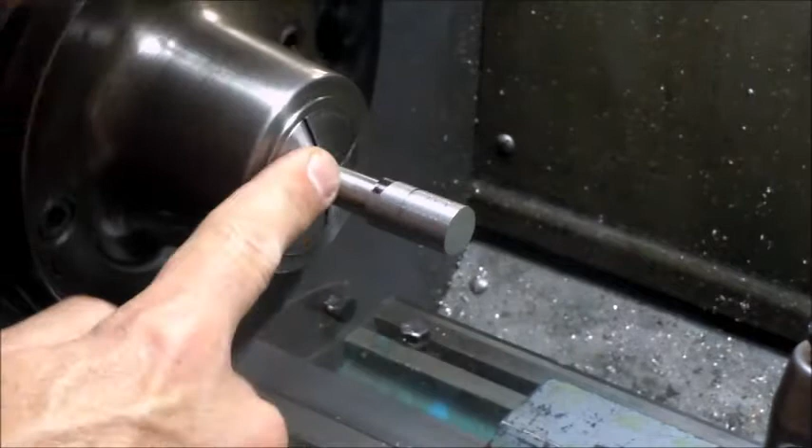So I've got the lead screw turned around in the collet chuck, and at this point I'm going to put a 1/4 inch shoulder here, or 1/4 inch wide by I think 625 shoulder there, and then I've got to turn 3/4 down to 0.53, and that gives us the material we need to put 375 square on there for the crank handle.

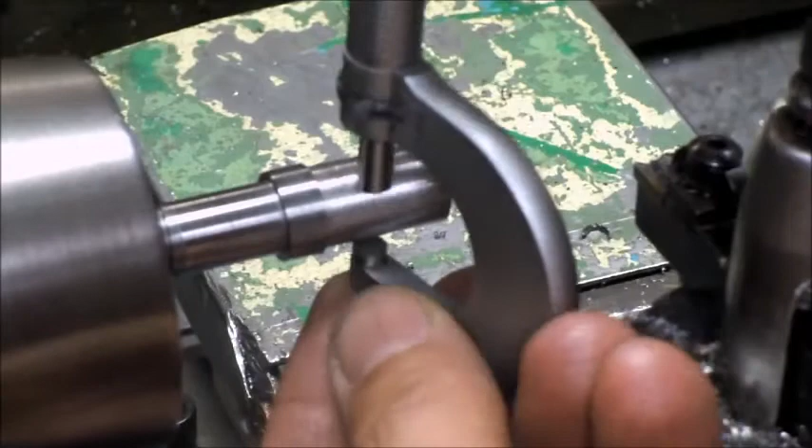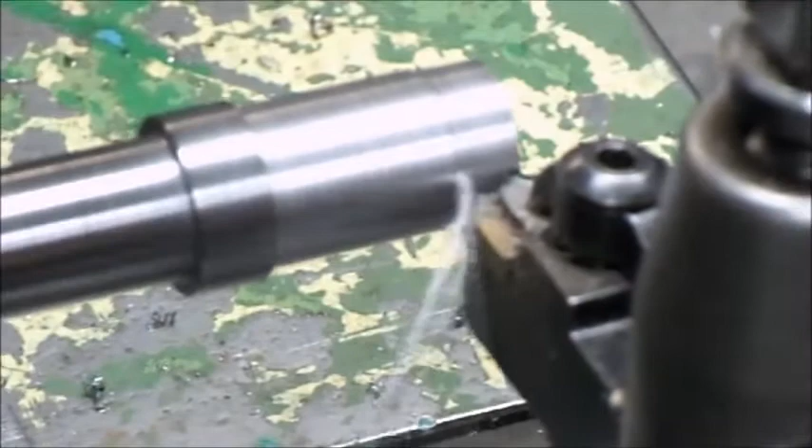So at this point I'm going to just turn this down to 530. Well, we're pretty close already. 559.5. I'm going to take 28 off. Got 4 to go.

Really not worried about the finish because it's all coming off. It's going to be squared up. One of the other things I wanted to do is put a radius on this end here, so as I put the square on, the actual corners will have a nice radius on them.

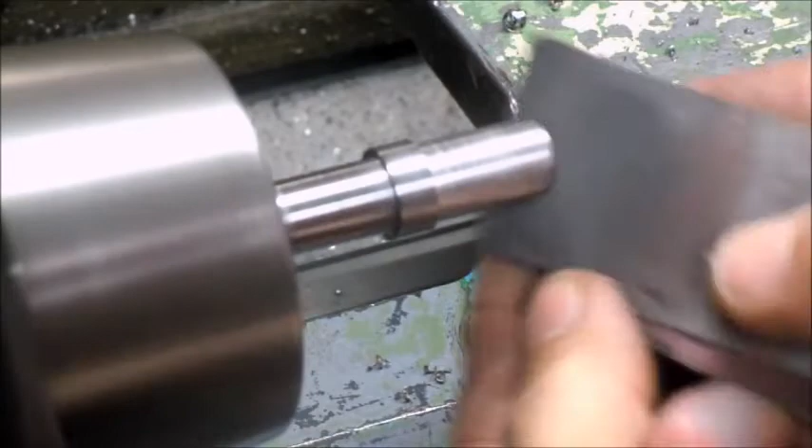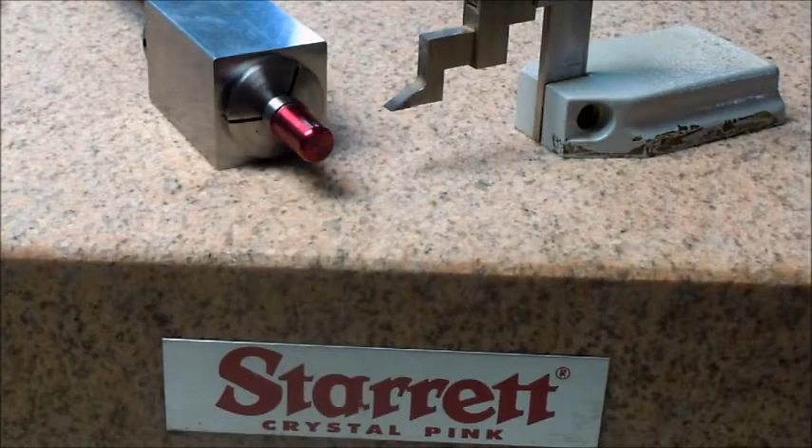One of the things I'm going to do is I'm going to lay out the 375, the 3/8 square drive on here, just because I want to file quite a bit of metal off. I could grind it off, and that's what I've done in the past, but I'm going to try and take a bit of the metal off so I've got some layout lines so I can get down close,

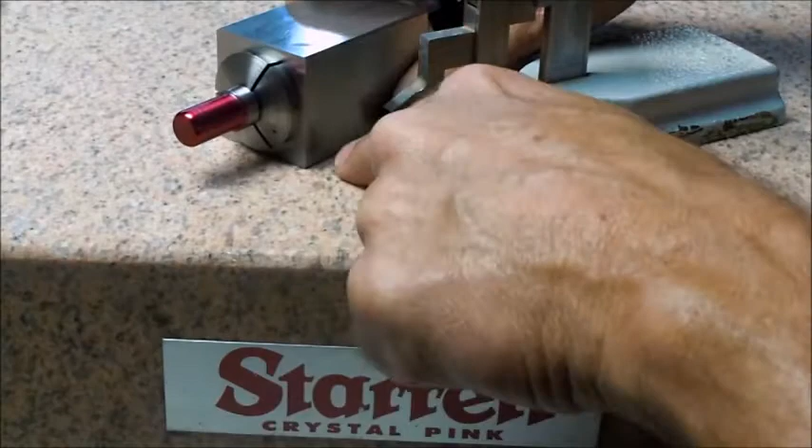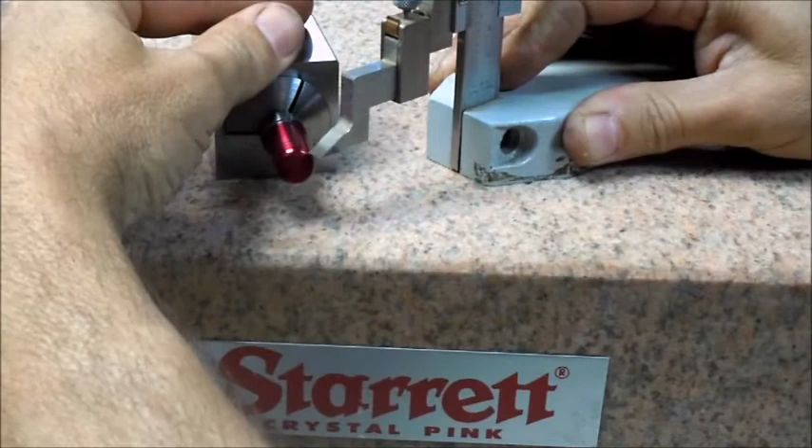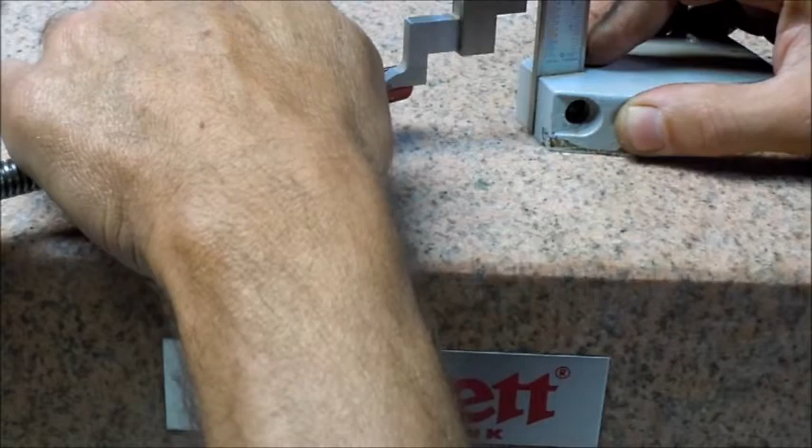and then I'll grind it. So what I've done is I've taken the square block, which I think is 1 inch 725, and then put the 3/8 in the center. So I've got the height gauge set up at 1 inch 050, which should give us a 3/8 square there. Well, looks like we got it right.

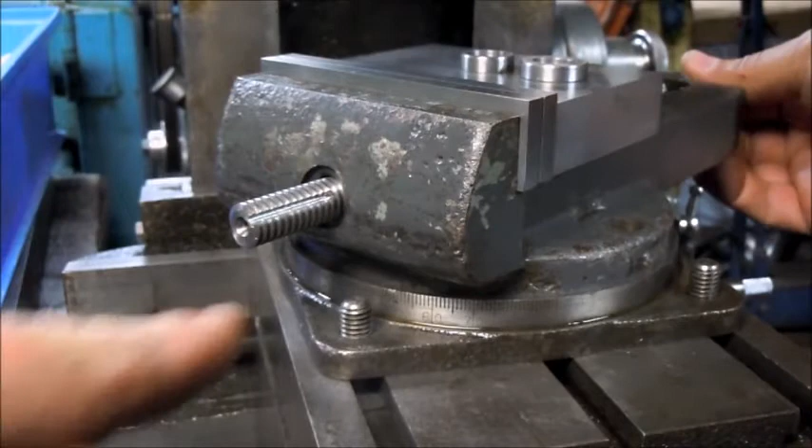Without a mill, I thought the best approach was just to get the slot there milled out. Took it to a friend of mine who's got a mill, and he took care of that for me. So at this point, this is how things go back together. That spacer goes in there, and then this guy here with the hole in it goes on there.

And then the nut here, and I'm just going to grab, I think it's 3/32. And so what's going to happen is I'm going to make a pin for this.

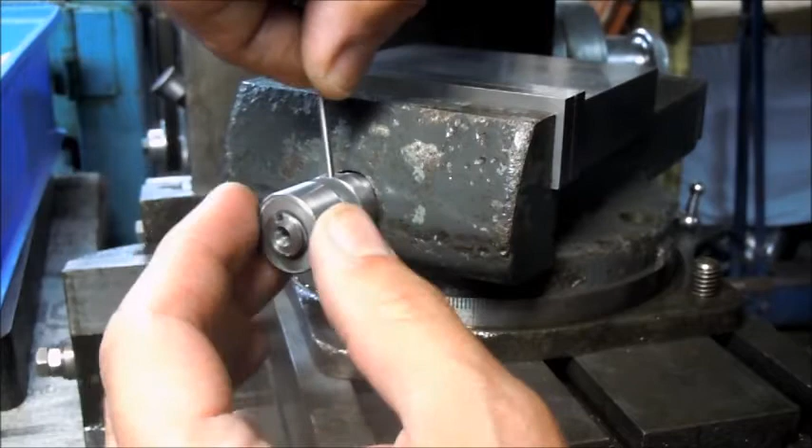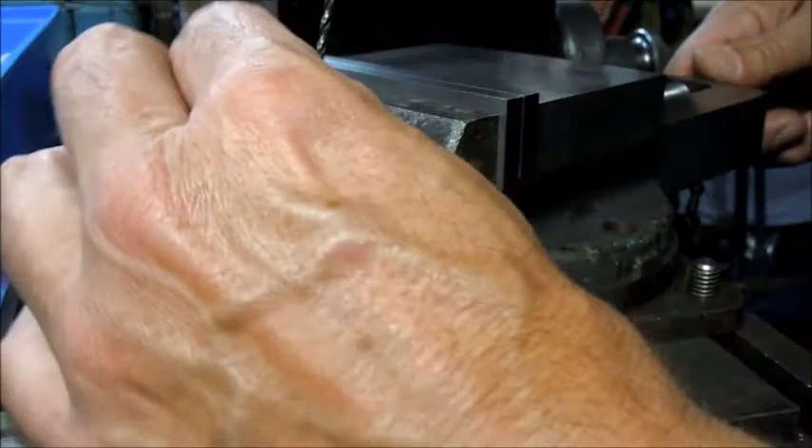And then what will happen is when this comes in to lock up against there, it can't rotate, so you create like a thrust scenario there. That seems just a little too tight. Trying to get where there's a little bit of play in the jaw here, and that'll give me a good thrust there.

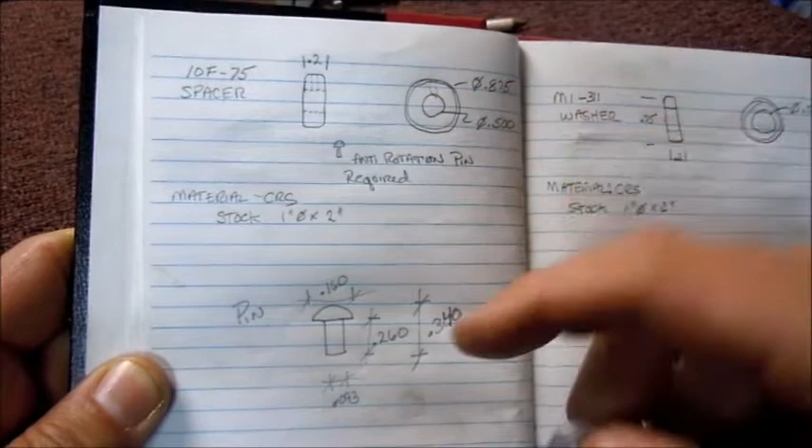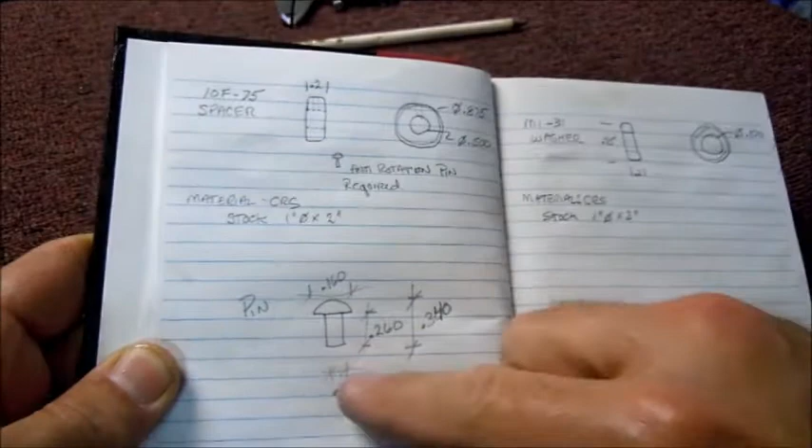Anyway, so the next step is to make a pin. It's going to kind of be like a rivet with a flat with a dome on top here. So what I need to make now is the pin that goes in this spacer, and that was drilled 3/32, so I'm going to try and make the pin just slightly under that.

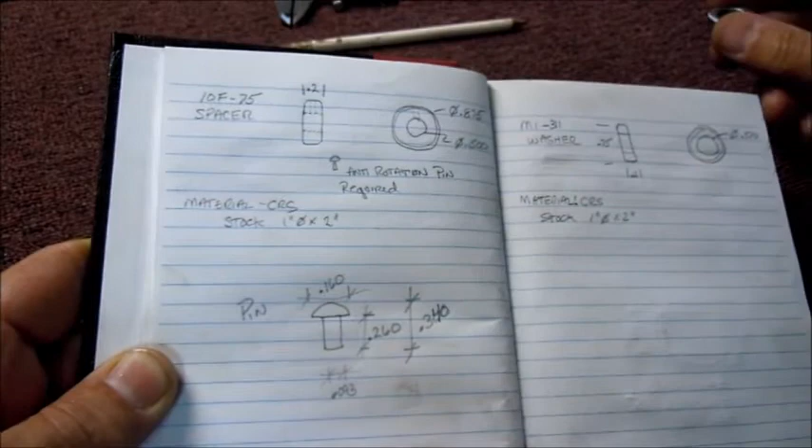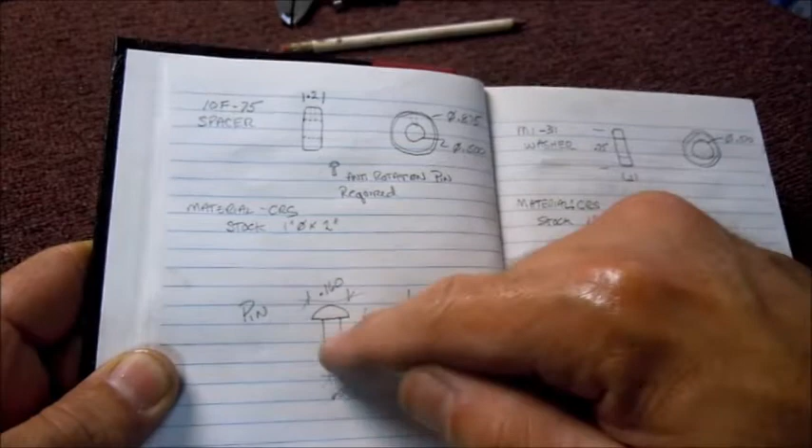The depth I need is about just over a quarter, about 260. That'll get me about 90 thou of engagement into the lead screw, and then I'm just going to put like a button top on it. Hopefully I can get just a slight press fit, and won't have to put any Loctite or anything on that.

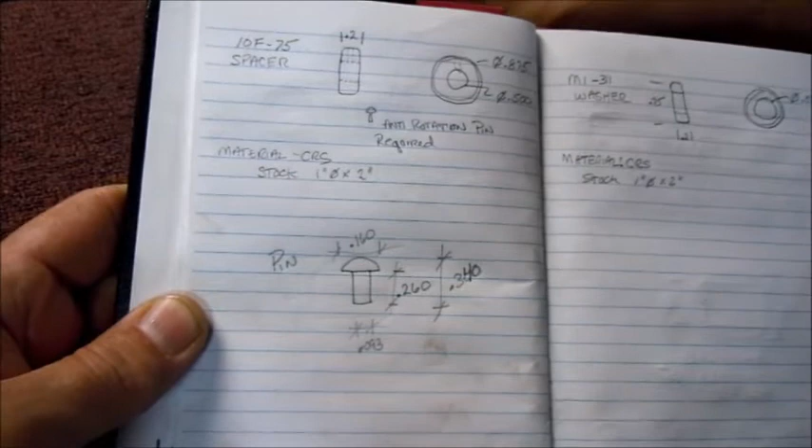So I've got the stock set up. I'm just going to use some 1/4-inch stock. I've got it set up in the lathe in the collet chuck, so we'll get started over there.

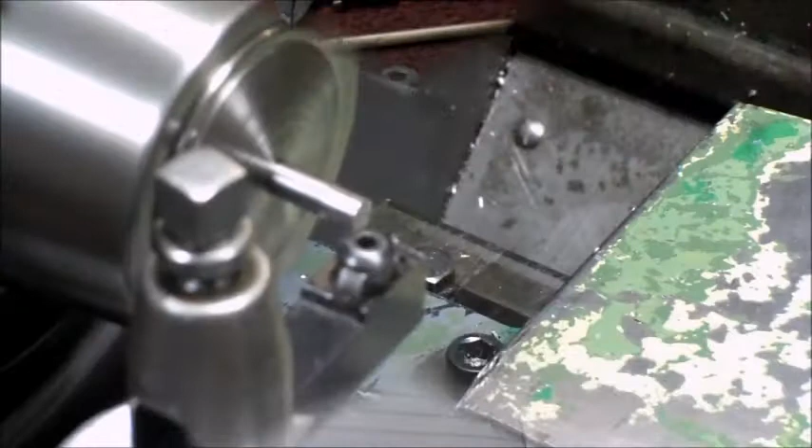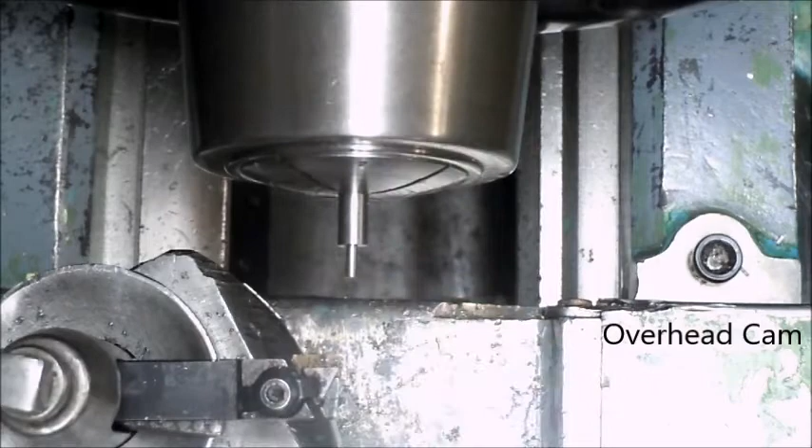So right now, I'm going to double check it. Yeah, it's 101 thou. I want to be down at 9. I want to start at 94. Need to take, or 93. This 3/32 is 93.8, so that's saying that's 95.

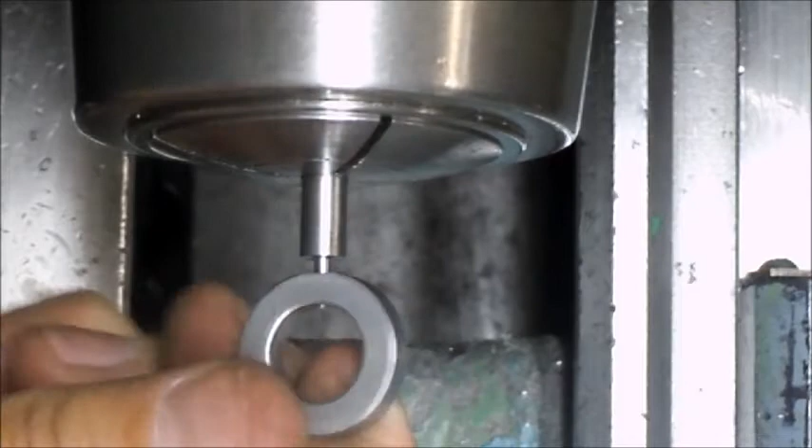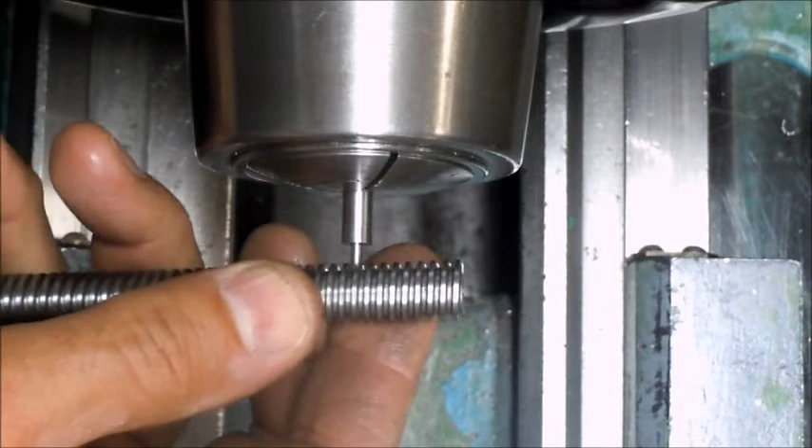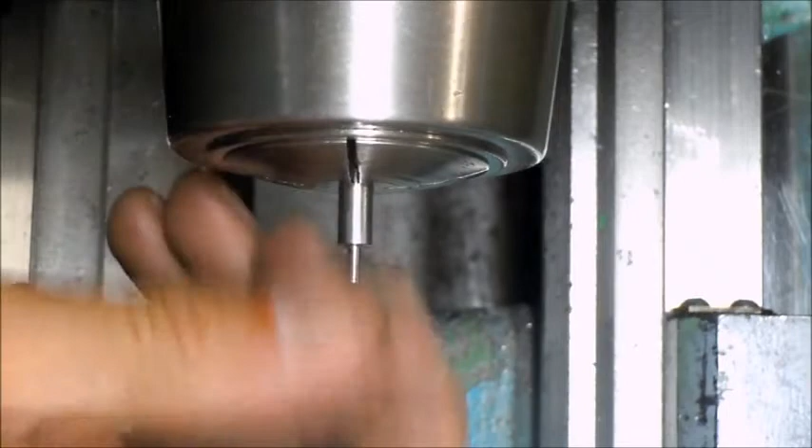I just want to check the slot in the lead screw, make sure this will fit in there. So it looks like it's gonna. And then I think while it's in the lathe here, since I can get that like that, before I pull that out of there, I'm just going to clean that up.

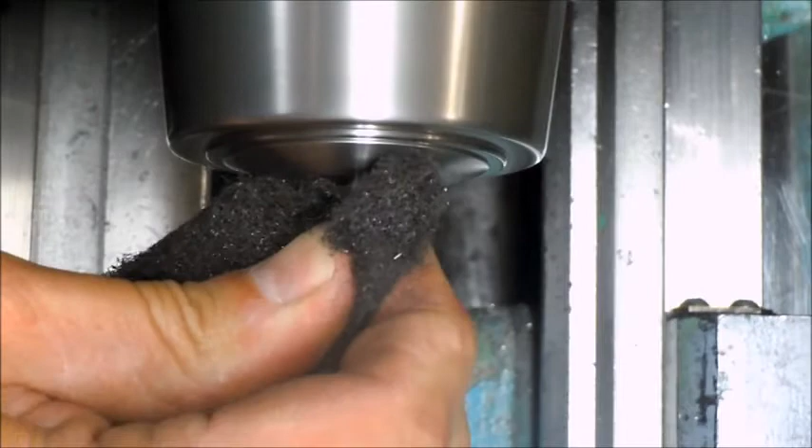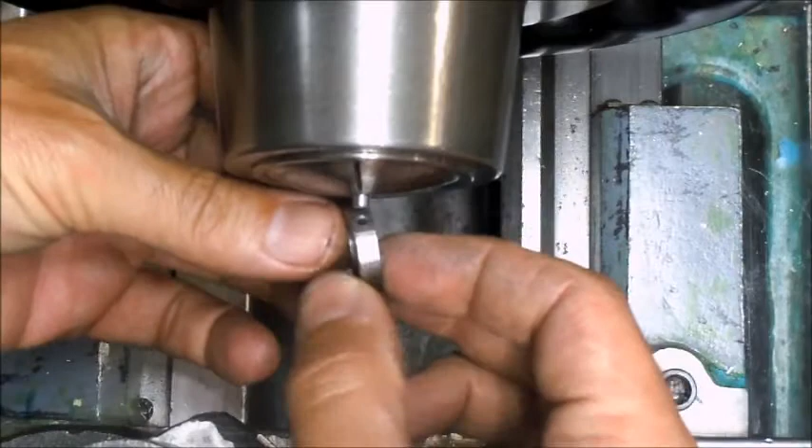So I'm going to turn around and put a different collet in the lathe here, and then we'll try and turn a dome on there. So that's 160. I'm already second guessing the dimensions. It just looks too tall for the width now. So that width is so that it's inside of the flat. So I'm going to take a little more off of there. So that looks good.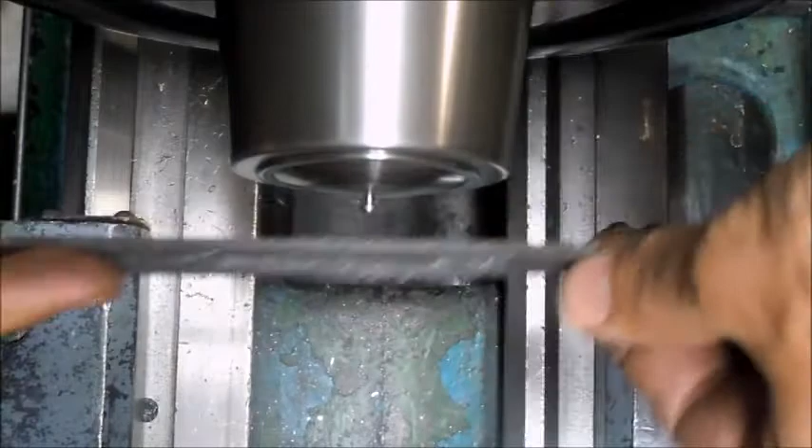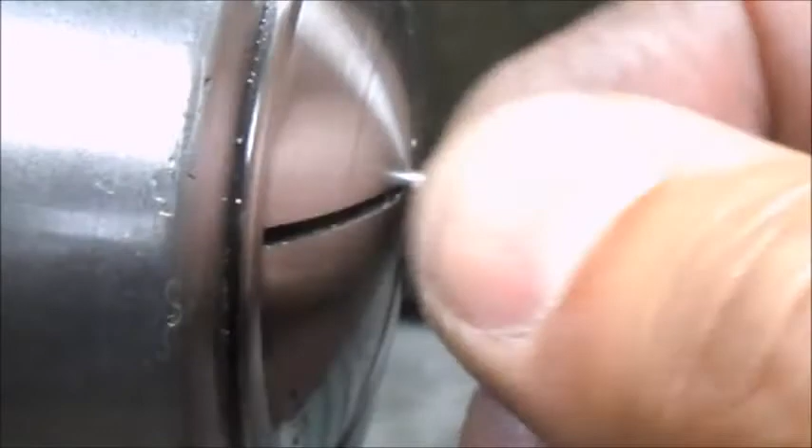So now what I'm going to do is I'm going to stick it back in the collet, but stick it out a bit so I can work it with a file. Happy with the shape of that now, so I'm going to pull that out of there and we'll see how it fits.

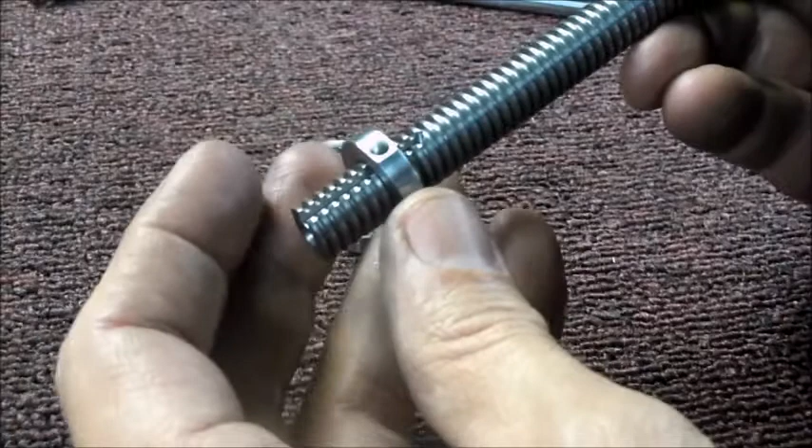So I've got the pin in there now. I think that shape came out pretty good. It's just kind of a snug fit right now. You know, I guess it's not quite as snug. I'm going to put a little Loctite on it once I put it all together, make sure it's going to work. I'll pull it back apart, but fits good on the lead screw. Ready for final assembly.

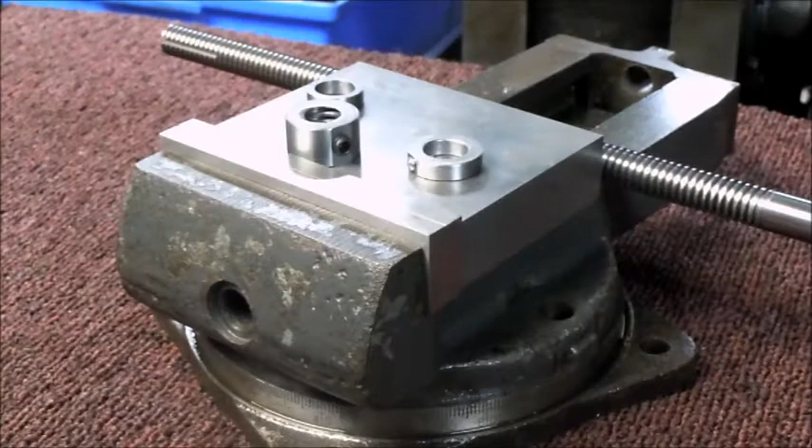So at this point I've got the pin in there with a little bit of Loctite, so that's ready to go. Got the 1/4-20 set screw there, spacer, we got the screw, so we'll put her together now, see what happens. So what I'm looking for, I want the jaw tight.

So what I'm trying to do is I'm trying to back the screw out just until this back end comes in contact with the casting, without actually moving the jaw, so that's basically tight. And now the spacer is going to go in. And then we got this guy going on.

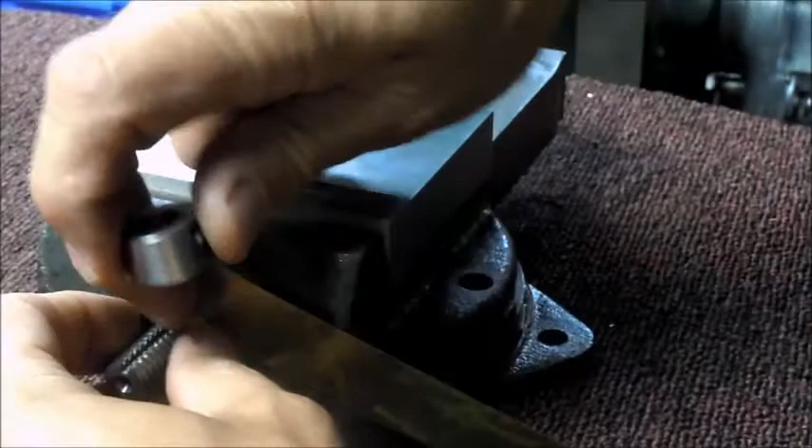And then what I think I want to do is, this is just a piece of shim stock I had laying around. I'm going to start out with, I want to put a little bit of play in there. I'm only going to put 6 thou in there.

So what I'm going to do is I'm going to hold the screw and just tighten up the nut by using the set screw here. And then I'll just tighten up the set screw. Pull the shim out. And there we go.

Lead screw's a little long, but I think I'm going to leave it. Pretty happy with it. It's gone together good. And at this point, next step is going to be to get it mounted on the shaper and see what we can cut with it.